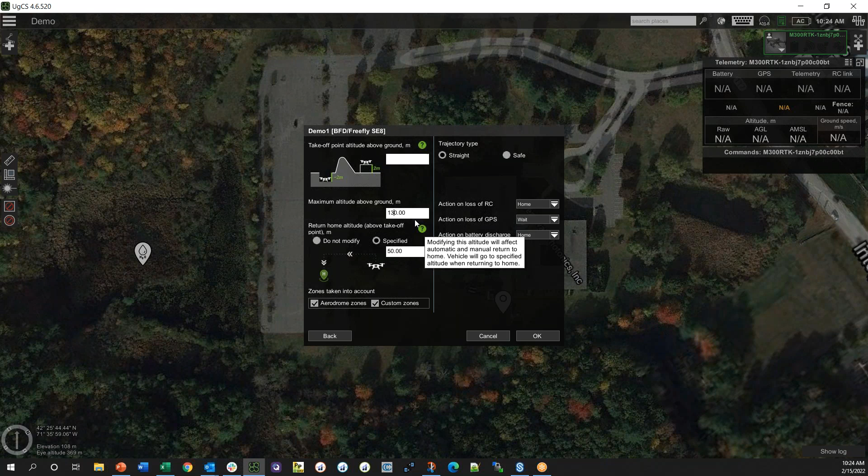Everything else I recommend keeping as is, and we'll say okay. Then you see this toolbar shows up on the left here. We're going to mostly be working on the photogrammetry tool, so we'll click on that, and then we're going to drop in our waypoints.

So we're going to double click, and this is going to be the corners of our AOI. And then once you're happy, click enter, and it'll close that figure.

And then it's going to take in whatever these values are, and then fill in so that you're covering that full lower yellow box with flight lines.

I'm getting some of these warnings here, and that's okay - we're going to click this little trash can icon to remove the action. So anything that says the word action, you can basically ignore or not worry about.

So the UAV and the sensor are obviously physically mounted together, but they're not actually communicating back and forth.

So what an action would be was like, say if you're using a Phantom and you wanted to trigger it to take a picture every 3 seconds or every 10 meters or something like that. So the action would be, trigger.

Whereas here we're not doing any communication back and forth, so anything that says the word action, we don't really care about.

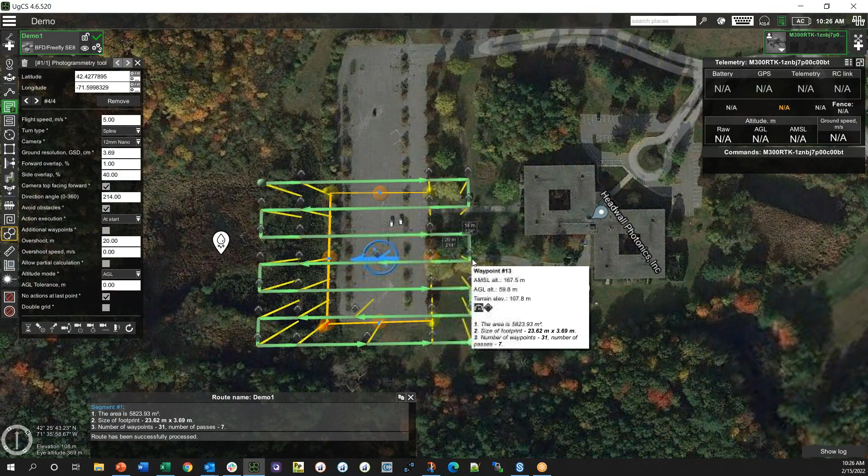Okay, so first thing I'm noticing is we're starting over here at waypoint 1 and ending at waypoint 31. I always recommend making an even number of flight lines, because in this case we're going to take off over here and have to fly all the way through our area of interest to reach this far point. If we make an even number, we start and end on the same side, so we don't enter our area of interest and fly over it getting data we don't want. So either I'd want to make the box a little smaller or bigger. Let's try going a little smaller. Now we're starting and stopping on the same side.

If you hover over it, it'll tell you the AGL altitude. In this case, 59.8, which is good. That's calculated based on the ground resolution, the GSD. The photogrammetry tool works by giving it a desired pixel size, and then it tells you, based on the camera and desired pixel size, what height you need to fly at. In this case I was trying to fly at 60 meters, so I back calculated to figure out what resolution I'd get at that height. Conversely, if I said I want 3 centimeter pixels, I could change that and it would adjust my flight accordingly — to get 3 centimeter pixels, I'd need to fly at 49 meters.

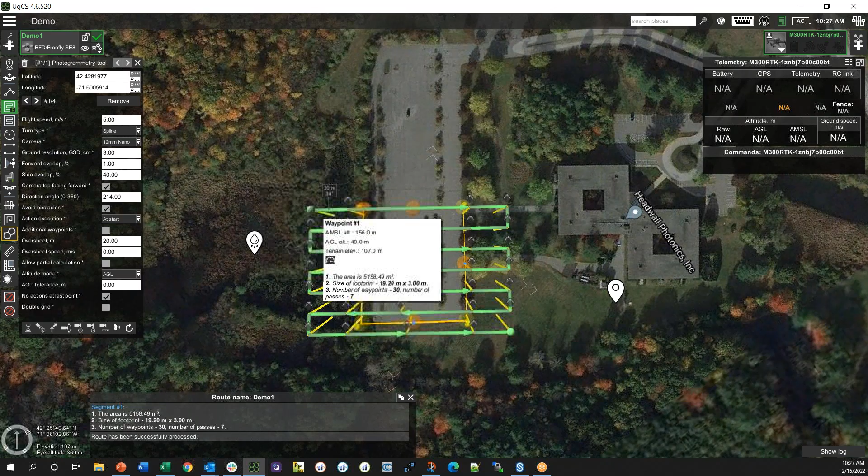Okay, we're going to work our way top down here. Each point in this photogrammetry box has a latitude and longitude. You can see there's number 1 of 4 — those are the 4 corners I dropped in, and you can change which one you're looking at. So if you had a field and knew exactly the coordinates of the corners, you could just type in exactly whatever you wanted for each one.

Again, you can always drag it around however you want. You can drag the whole thing if you highlight that center point, and you can orient it different ways.

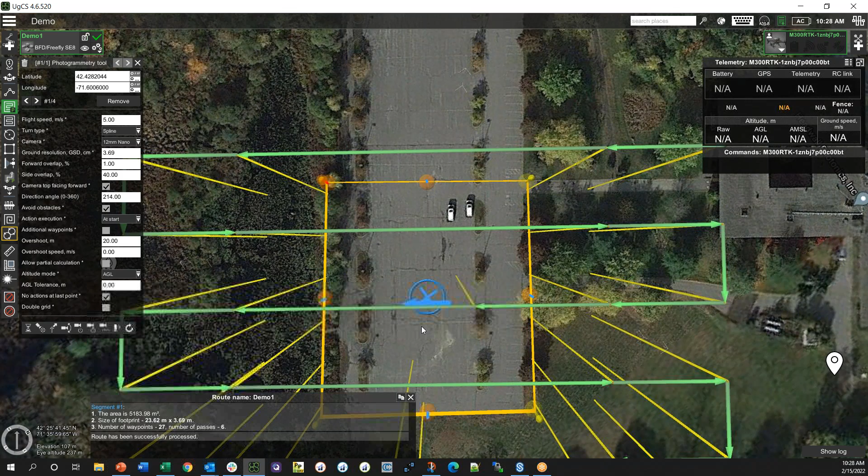Can you import shape files? I don't believe you can import shape files, but you can import KMLs. That might be a question for them — they might have that ability, or if not, they're always looking for recommendations, so that could be something you could request and they might add it in. But yeah, KMLs you can. Either one works. That's good. Thanks.

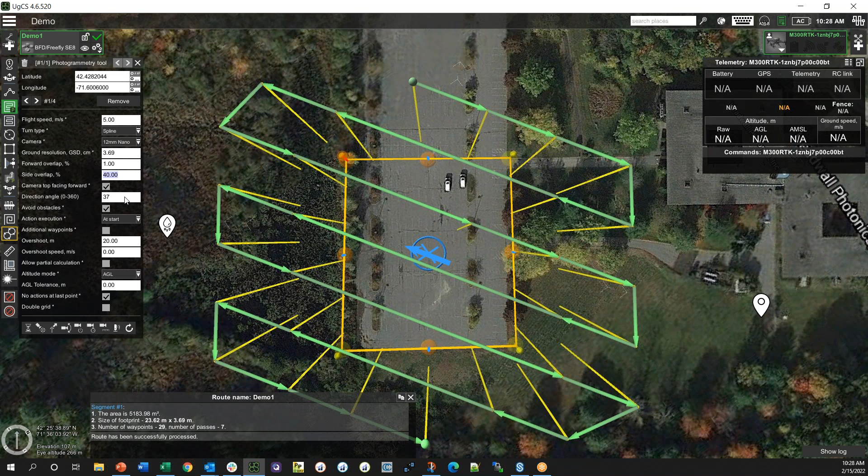Okay, so next thing is the flight speed. That's actually the only setting we don't really adjust ahead of time, because it's dependent on the lighting conditions. Usually I'll just leave it at the default 5 or whatever, and that's the last thing we'd adjust before uploading it to the UAV.

Next thing is the turn type. We have the options of spline or straight. For the GPS inside the system, the spline turns are better — a more rounded, less abrupt turn. The GPS has what's called a Kalman filter inside it, which essentially uses its previous position to try to predict where it's about to be. So anything abrupt or quick takes some amount of time for it to figure out that it's made the turn. Anything more rounded and less abrupt is better, so we like these spline turns.

Camera — it's already chosen that 12mm nano because that was associated with that UAV. I also see I have a different sensor in here that I could have chosen as well. You should only have that one unless you're building in multiple different sensors, so make sure if you have multiple, you select the right one, because that's what dictates the pixel sizes and things like that. We just talked about the GSD, and then overlap — with the line scanning systems we have here, we don't use or need any forward overlap, so we set it to the minimum value allowed, which is 1%. But we do want side overlap, and we recommend 40%.

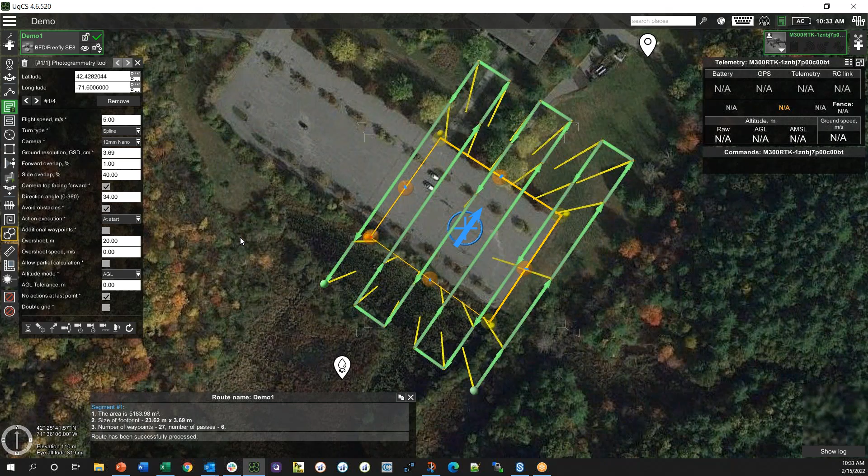Usually what this is, you can build in your own obstacles into the software. For example, I know this over here is like a cell tower or some sort of tower. So I could put in a physical obstacle here that would say don't allow anything within, say, 30 meters of this point that is 100 feet high or something like that. That way, if I tried to build a flight plan that intersected with that, it would say nope, you're going to run into an obstacle. So that's what that would be.

I typically leave it checked, but I don't usually use that feature. I instead will just do a visual check of the scene ahead of time, or fly with a Phantom or a small drone to see how the area is looking, see what's my tallest thing in the area, things like that.

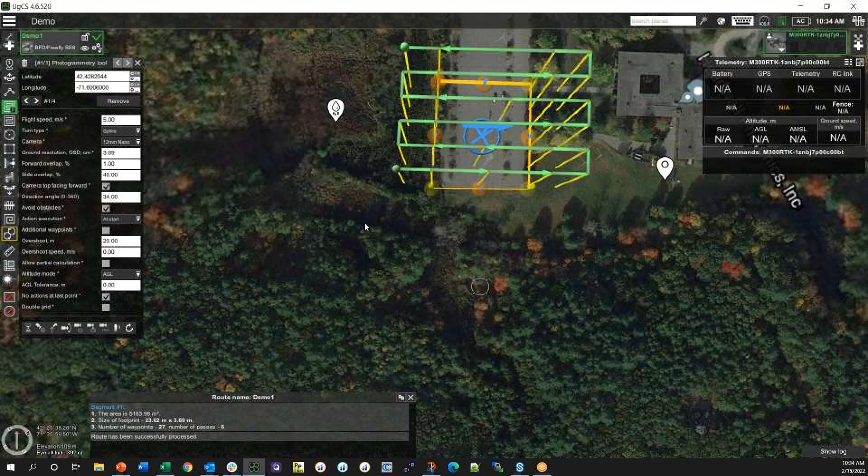Okay, action execution. Again, anything that says the word action, we ignore, we don't really care about. Additional waypoints, kind of a weird feature, but usually we don't use it. You can see if I click it, it's going to add in a bunch more points, which you'd think would be good, except for the fact that I think a lot of these systems can only take in a certain number of waypoints they can hold in memory. I know with the DJI products it's 99. I'm not sure with the SE8, it might be more like 300 or 400, so that might be helpful. But if you have a waypoint every couple meters over a large field, you're going to eat that up really quickly. So usually we don't need this checkbox.

Next is overshoot. There's two ways to do this: either you add in overshoot by having a number here - you can see it added 20 meters on either side of every flight line - or if you are waypoint restrained, you could set that to 0 and then just physically drag your box to be bigger. But we always want to make sure we're executing our turns outside of our area of interest so that we're not taking data when we're doing the turns. So we recommend about 15 to 20 meters of overshoot, and you should be good with that.

Overshoot speed, just leave it at 0 or blank, and it'll take whatever the flight speed is. It doesn't really help to speed up or slow down during the turns - it's more of a battery killer to change the speed like that. So I recommend just keeping it at whatever it is. Maybe if you're flying really slow and wanted to turn around a little faster, that could be okay, but in general, just leave it blank.

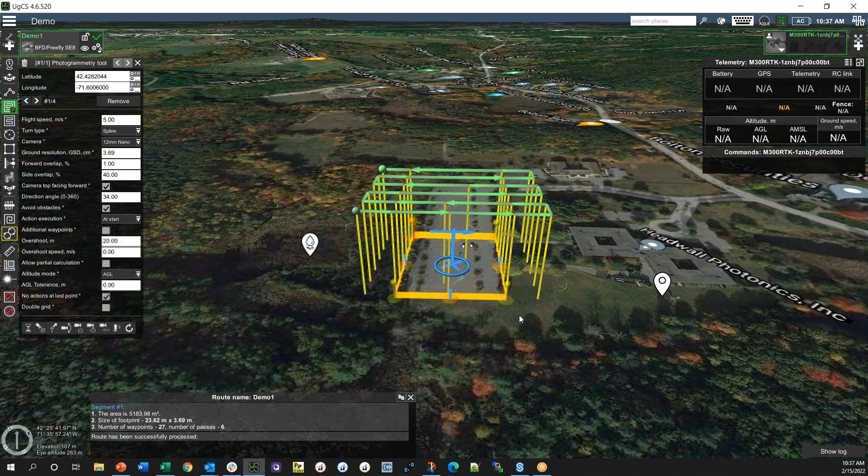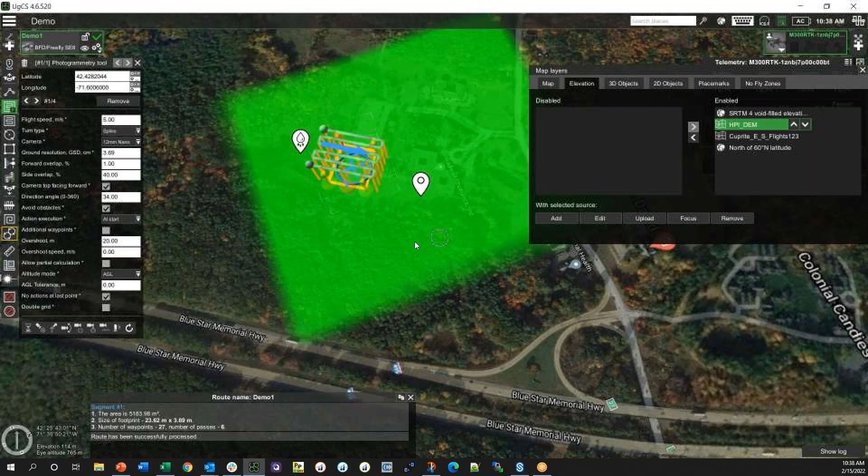Another good feature of this software is you can add in your own elevation model. If you go to map options, map layers, you can add in your own visual map, or your own elevation map. So here this SRTM is the top one, that's what I'm using. But if I click on this one, this is one I generated from a LiDAR flight, and you can see if I'm within this shaded green area, it would use that elevation model, which would be much higher resolution than the 10 or 30 grid that the SRTM one has.

Just be careful if you're ever using your own elevation, you don't want to span from one to the next. If you zoom in over here... that's why - there, now I'm using that. You can see it'll take whichever one is highest on the list. Because there's some sort of change in the datum between the one I have, which you can see all the relief from the trees, and this one, you don't want to span from one to the next because there's this imaginary cliff it'll get really confused by. So if you're ever flying with your own elevation model, just make sure you're not spanning from one down to the next.

And you can see here, now if we look back at the mission, it's going up and over this tree and things like that, because it has all these cars in the parking lot from when the DEM was made. So I'm going to go back for a second.

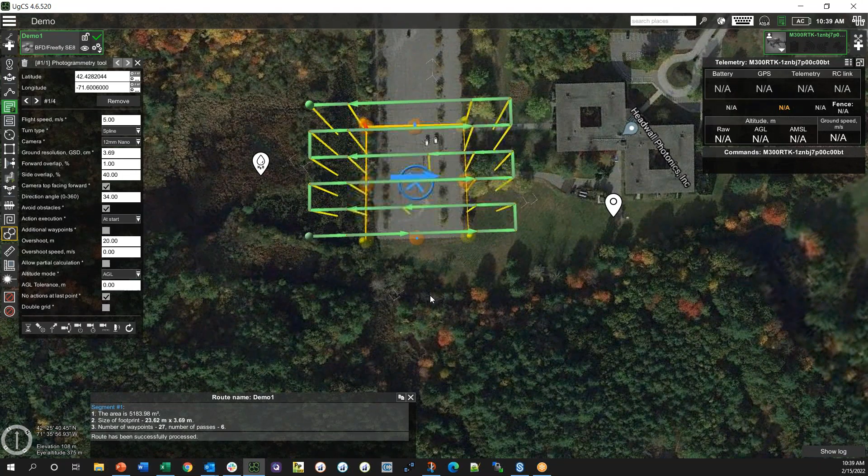Charles: does it matter what file format these DEMs are in? It does - I think there's 3 or 4 different kinds, I don't know those off the top of my head, but I think there's something on their website which says which are acceptable. Any TIFF file should be fine, and I forget which other ones they can take in, but there's a couple different types.

So it sounds like the fine scale local DEM may actually cause trouble by making it go up and down over trees or cars that used to be there, and a smooth one might be better to get a more consistent pixel size. Yeah, so it's kind of up to you.

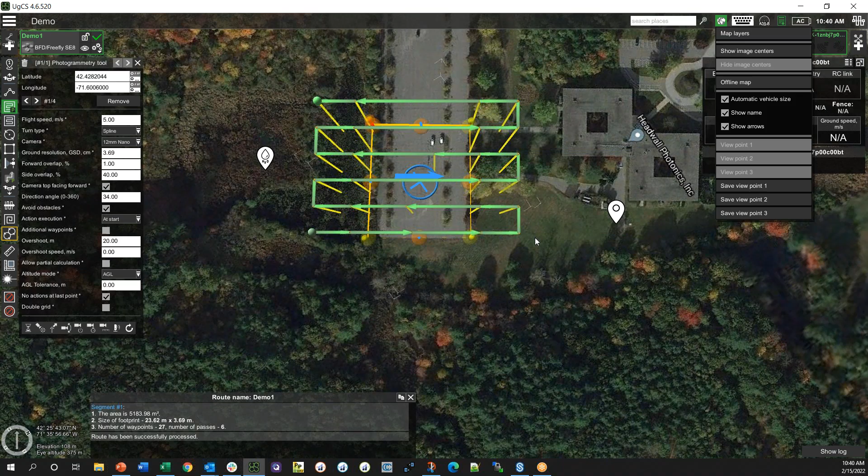So if we go back for a second here - what I kind of recommend, this bottom thing, this AGL tolerance, that's a way you can make your elevation coarser or less coarse. For the SRTM DEM, it's already very coarse, so I brought this AGL tolerance down to 0.

Whereas on the opposite, if I'm using this guy, now you see I'm going a little bit too jaggedy over this tree and things like that. Maybe what I'd want to do is make this a higher number, like 3 maybe, and that would smooth it back out a little bit. So you can mess around with both ways and see what's best for your situation - maybe try 3.

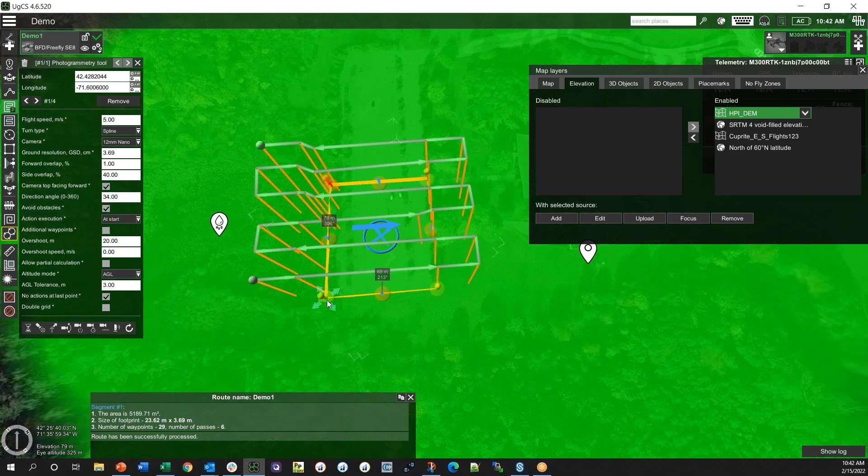You always want to be the most consistently above the terrain as possible. In most situations, the generic SRTM DEM is good, but if you are in places with high relief or hilly terrain, or for example missions in mines where the ground has physically changed since the DEM was generated, then I imported my own and used it that way. It's kind of up to you and the location to figure out the best course of action for that area. Typically if you're flying over relatively flat areas, fields, rivers, or in this case a parking lot, it's fine enough to use the SRTM DEM.

So the modes are AGL, AMSL, or this rangefinder option. I don't know what that rangefinder is, but AMSL basically means you have a constant height above sea level. In this case it would take in, probably from the first point, a height of 60.2 meters above that point, and then everything stays the same height - it's not going to take in the elevation data. So we always want to be in AGL.

Then I was talking about this AGL tolerance. For the SRTM DEMs, I recommend going towards the lower limit. You can see by going from 3 to 0, it's about how closely it follows that elevation model. It added in a few points because it recognized there's a small hill over here, so between here and here there's relief of more than 0 meters, and it said I'm going to add in a few different points so I can more accurately follow that terrain.

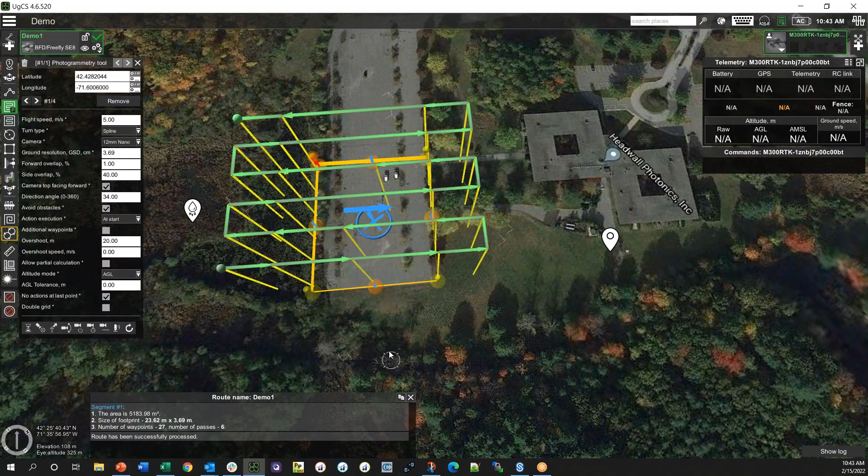Next thing we're going to do is this add first waypoint button. I'm not sure about the SE8, but with a lot of other UAVs I've used, there are built-in safety features that won't allow the first waypoint to be more than 30 meters away from your takeoff location. So I want to build in where my first point is, and now it's going to fly here, then here, then do the ladder pattern. Conversely, you can add one at the end as well. You always want to make sure you're adding after whichever point is selected - I'll click on this waypoint, then add after that last point, and it'll bring me back over here.

So that is the flight planning part of it. The second thing to be aware of is the polygon, which is what the sensor uses to trigger. You can create that polygon as a text or KML file - in Google Earth, with our online polygon tool, but I actually really like using UGCS for that as well, because it's much easier to overlay the flight plan and that polygon tool at the same time.

I'm going to click Add New Route and name it Polygon. We're not actually going to do a flight with this - it's only for the information of where the waypoints are. You can click whatever UAV you want, we'll just click the SE8 again. Next, and this time we're going to use the perimeter tool. Now you can see we have two routes - our first one, and then our polygon. The polygon doesn't have anything in it yet. You can see this one turn bluish because it's in the background now. For the polygon, we're going to go to our perimeter and drop in our box, then hit enter when you're happy.

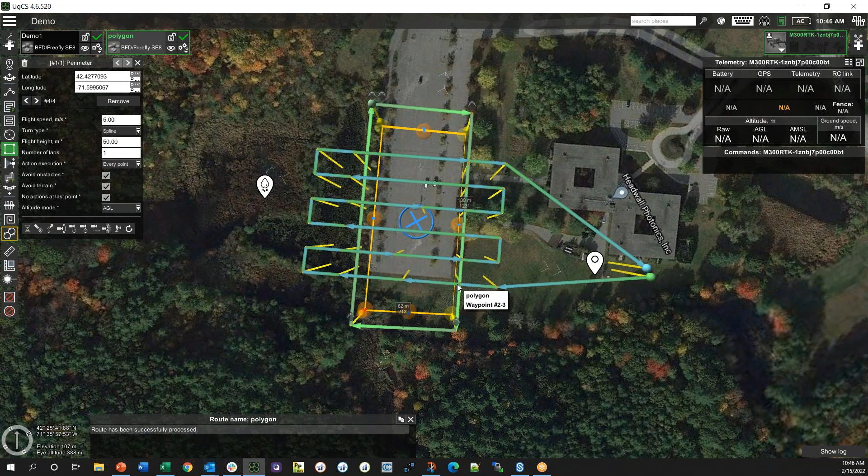Now I have this flight plan, which I can export as a KML, so I have the information of where these points are. Anytime I load this KML file to the sensor, whenever the GPS says I'm inside that area of interest, it's going to turn on capture, and anytime I'm outside, it will pause capture. So in this case it would be off, off, off, off, off, and then when it hits here it's going to collect until it gets to here, then pause while it does the turn. You want to line up your polygon with where your overshoot starts and stops.

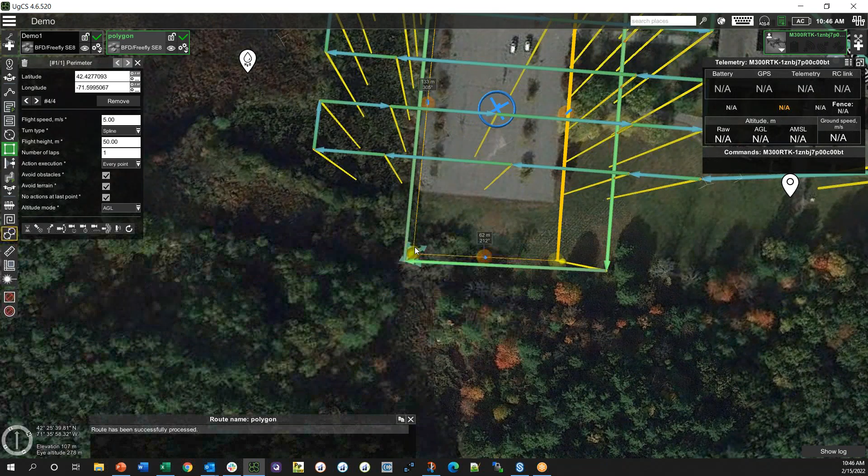That's pretty good. You also want to make sure that your polygon is a little bit wider than your flight plan, because the GPS on the UAV is not super high grade. So you tell it to fly this line, and it could be a meter to the left or a foot to the right or whatever. You just want to make sure you have a buffer on the sides so that you don't accidentally miss the first pass of data if you flew just over the edge. So I always like to make sure this is a little bit wider.

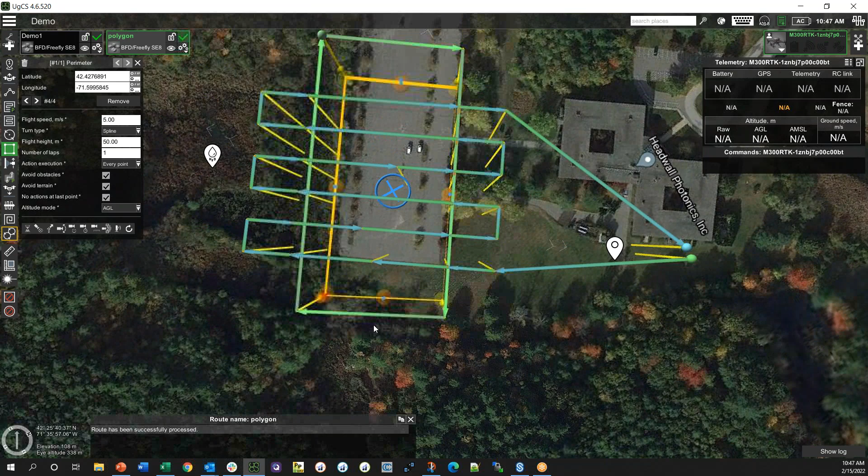And once you're happy with your polygon, you go to parameters and export to KML. You want to export it as a line string, and then give it a unique name or location and save it.

And when you're done with your mission, you go File, Export Mission, and it'll save as whatever this name is unless you change it. Then you should be good to use that when you're ready to fly. Okay, so I think that is most of it for the UGCS stuff. Any questions on any of that?

So it automatically decides when to snap the photos based on the camera specs, flight height, and amount of overlap. As it's moving along the flight line, it crosses into the polygon, and after that it takes images at a frequency based on its calculations of the correct overlap in the footprint. So you don't have to control anything about when the actual camera is triggered.

We'll go into some of that setup, the acquisition setup, next. But basically you figure out all the parameters on the ground, then load in this polygon, and once it enters, it will collect frames continuously from here to here at whatever rate you told it to. It'll pause when it's outside, doing its turn, then start again here, pause here, and so on and so forth. But yes, you're correct.

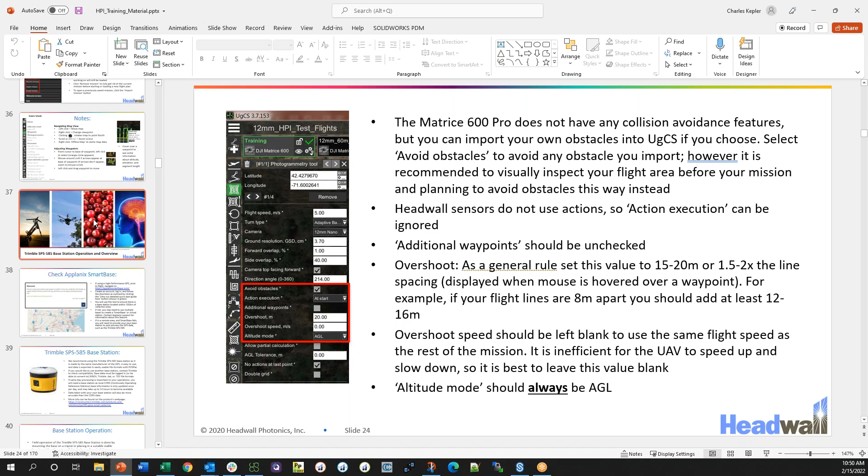Okay, I can't remember—did you guys purchase a base station with your system? I'll take your silence as you don't know or no. We did, I believe we did. Yes, we did, with the Expo.

Okay, so if you purchased it from us, it would look like this guy, the SPS 585. How it works is the UAV is the rover, and it needs a base so it can do all of its calculations on where the corrected trajectory was and all that kind of stuff. So the base, you will set this up before the flight. It needs to be logging for at least 15 to 20 minutes before and 15 to 20 minutes after.

If you don't have one of these, or don't have it on that specific day, that's okay. There is a network of CORS stations, continuously operating reference stations, hosted by the government. You just have to make sure there's a station near enough to you. Anywhere in the continental US, you should be fine. If you were to take this into the jungle in South America or somewhere, you might want to check ahead of time or make sure you bring the base station with you. So basically, set this up a little bit before and leave it running a little bit after.

What it's going to do is it's just going to continuously collect its GPS location, and then over time it's going to have an average and know exactly where it was. Then it uses that known location with the location from the raw GPS files, and it does some corrections to say I know exactly where I was based on all that data.

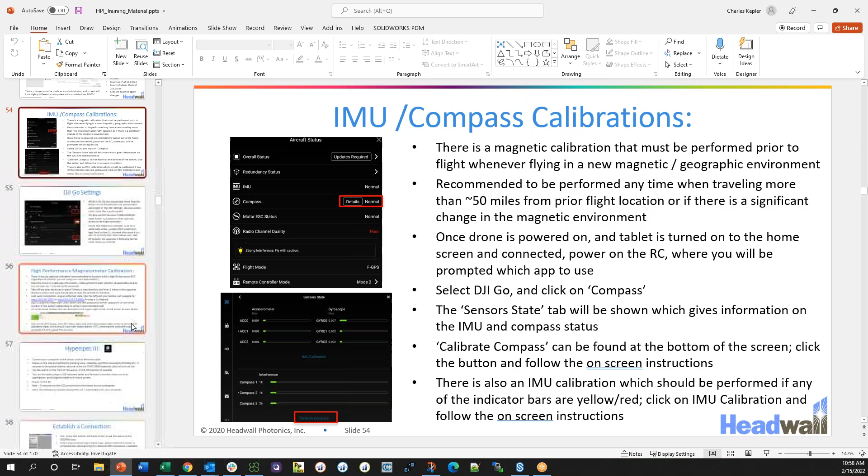There is a magnetometer calibration though for the GPS in the co-aligned. So this has already been done once, at least for your system, while it was at Headwall. But it says it's kind of an optional calibration.

It's recommended anytime you're flying in a new geographic location or a new magnetic environment. So anytime, my recommendation is anytime you move more than 50 miles or something like that, or you're flying somewhere where the ground has significantly changed. Like for example, if you're going to go fly in a mine or something like that, where there's a bunch of different rocks and things like that.

So what that would be is you'd let the system be powered on, sit on the ground for 1 minute, and then take off. Once you're in the air, you're going to rotate clockwise and then counterclockwise, 3 full rotations in each direction, with each rotation taking at least 10 seconds. You're going to rotate 3 full times and then rotate the opposite way 3 full times. And then you should be all set there.

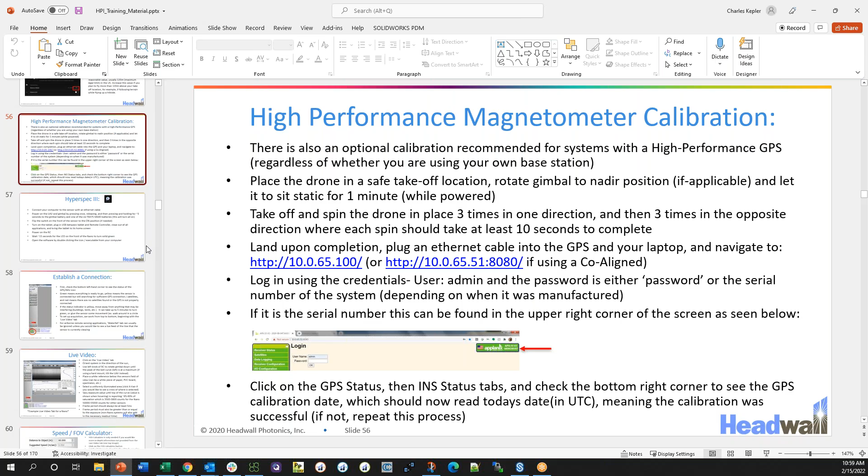Okay, into HyperSpec 3. So let me jump forward for a second here. Okay, so...

Here's kind of a diagram of what the co-aligned looks like. So instead of the M600, you'd have the SE8. But so on the UAV, you have your antenna and your power coming out. Inside of the co-aligned, you obviously have your VNIR and your SWIR. The LiDAR you guys don't have a LiDAR, so you would ignore that part.

The Applanix is on the SWIR side, but it is giving data to both the VNIR and the SWIR, and then the HyperCore is the computer for the SWIR. So you have your computer, and then you're going to need to connect the Ethernet switch, because there's the 2 Ethernet ports on the co-aligned.

So the Ethernet switch gets powered by USB, and so then you have laptop into the switch with an Ethernet cable, and then 2 Ethernet cables from the switch, one into the VNIR, one into the SWIR, and that's how you can talk to both sensors at the same time.

To connect to the GPS, if you want to check that that calibration took, or if you want to download your GPS data after the mission, you're going to go to 10.0.65.51:8080 while you're connected to the SWIR port, and that's how you would download that data.

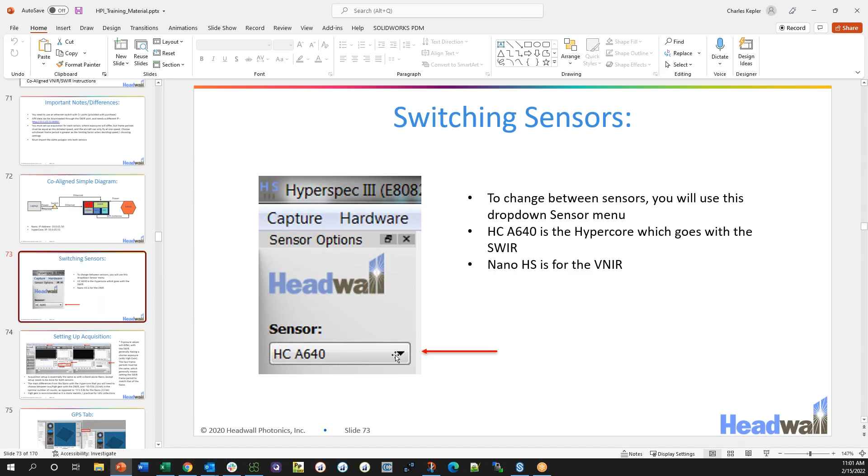Okay, so in HyperSpec 3, you'll first notice this sensor tab. It's a sensor dropdown, and you'll see something like HC for the HyperCore, and then if you click the down arrow, there'll be one for nano for the VNIR.

So when you're setting up the co-aligned system, what you're going to do is consider it as 2 separate instruments that you have to set up. So you're going to open up the live video on the nano, and then you're going to open up the live video on the shortwave. And so you'll have these 2 separate plots.

They'll look pretty much the same, with the exception that the shortwave has a gain level of high and low. We recommend high gain for anything remote sensing based, because otherwise with low gain, you would have to fly much higher and slower. So even though with high gain you sacrifice a little bit of signal to noise, it's much more reasonable to use high gain for anything remote sensing based.

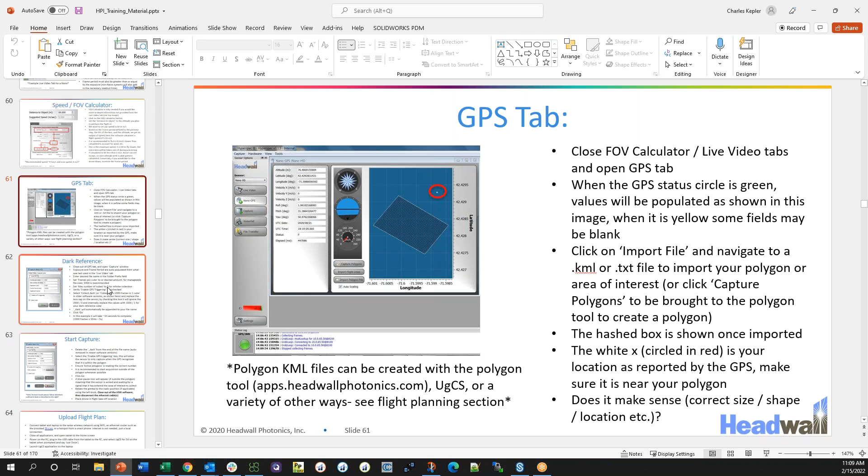At this point, you're ready to take your dark reference. So we're going to open up the capture tab. Here's what I was saying, you have to do it on both sides. Okay, capture tab. So for the co-aligned, this is actually the only tab that you have to click on only one side because it has integrated both.

So you'll click the capture, and you see it says Nano and Hypercore. You'll give it a name, whatever you want, Cornfield 1 or something like that. It'll be appended, it'll add in before the file name, when it's actually created, a string of numbers like 00015, which means that's the 15th data set stored on it. Then it'll say corn 1 or whatever you tell it in this folder prefix, and at the end it'll attach the timestamp. So it'll say something like 02152022, and I think it might have the time as well.

So we have frames per cube and max number of cubes here. Frames per cube is how many lines are going to be collected before it writes the file. In this case, what we recommend is 2000. That gives us reasonable file sizes of about 0.5 gigabyte per file. If you make it bigger, you're going to have larger files which are harder to work with, and if you make it smaller, you're going to have a lot more files. So we've found that 2000 is a good middle ground.

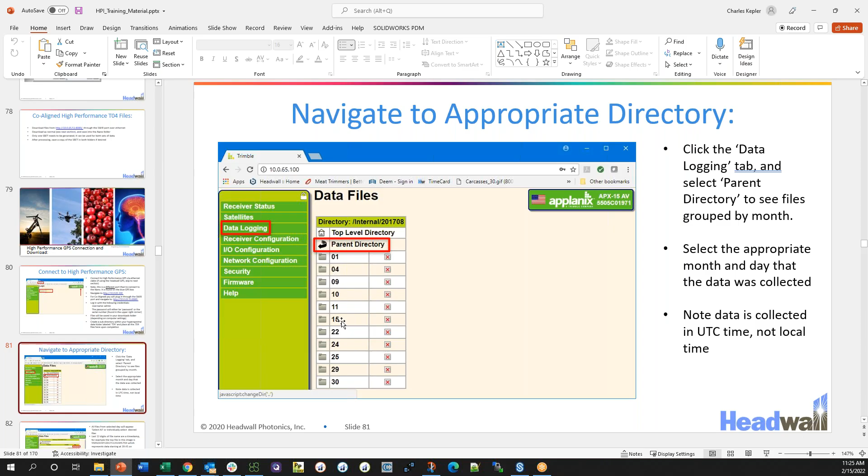To download your data, you'd go to this data logging tab, then the parent directory, and then there's going to be, it'll look kind of like this, but it'll be the number of the month. So for February, you'd go to 02, and then today you'd go to 15, and then it'd open up all the files that were taken for that day.

So here you see that it has a unique file name. This 55 blah, blah, blah, that's the serial number of the system. And then this specific file was taken on 2017, 11/15 at 1945 UTC time. So each of these files are 3 minutes long, so you can see we have 24, 27, 30, 33, 36, 39, blah, blah, blah.

So you want to figure out which files overlap with your flight time. I recommend doing that by, if you go to your, here, I'll just show you an example.

In your data directory, there'll be a file called imu_gps.txt. What I recommend, this file is started as soon as you click the go button. So you want to find this number, which is 1532, and then the last number is 1550. So you want to find the files that encompass between 1532 and 1550 in increments of 3.

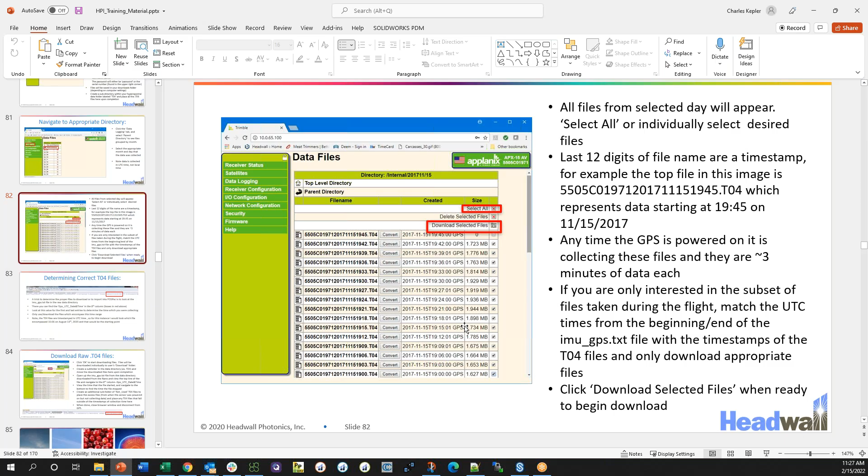Here, like I said, when you click all the files and then download selected files, a pop-up like this will pop up that says, do you want to download these selected files? So you say okay, it should just go into your downloads folder. And once it's done, then you can copy those into, I like to put them in a subfolder that I label APX or GPS or something like that. And then I put that directory in my data directory as well.

And so the next thing is, once you have all the GPS files, is to create the SBET through POSPac. So I think maybe I'll do a quick live demo as well for that.

Okay, so this is the POSPac software. It is sometimes a little bit of a pain to get licensed. So you'd have to go into, when you download this from their website, there should be this thing called software license utility, which is downloaded alongside it, which I'll show you quickly.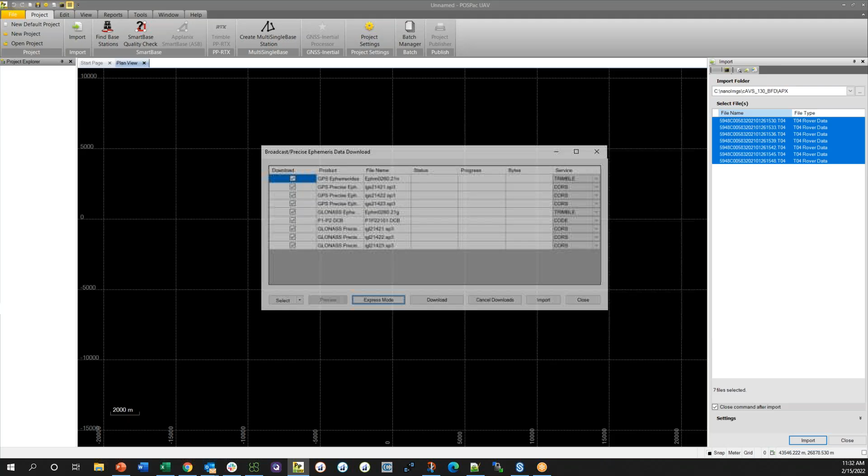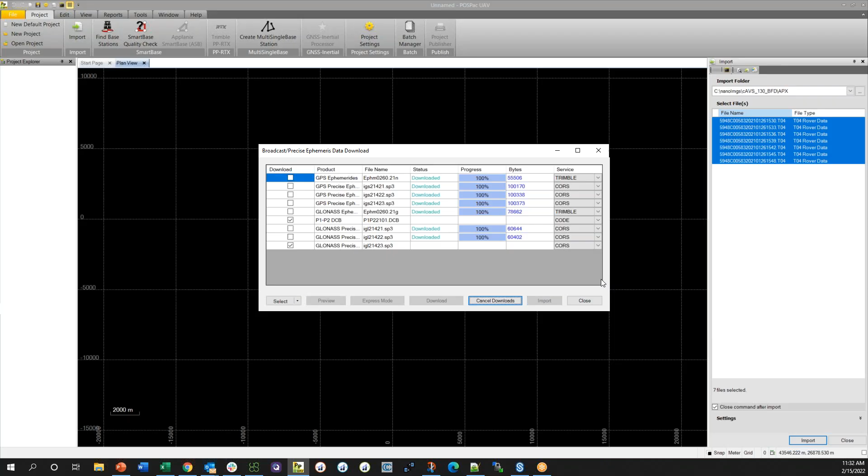It's gonna do its thing. And boom, here we are. So you can see this is my pattern over the parking lot. Looks like I did 6 passes. And you can kind of see my down and back from before and after the flight, and then some kind of wonky data from when I was sitting on the ground.

So at this point now I can also go back to the import again, and now I'm going to also import the base station. This one I had labeled 01/26/2021. That was probably the date that I did this flight.

And so now that I have my base and my GPS data, at this point you want to go to this little drop down and then find base stations. And then I'm going to right click this and do this compute RTX coordinates.

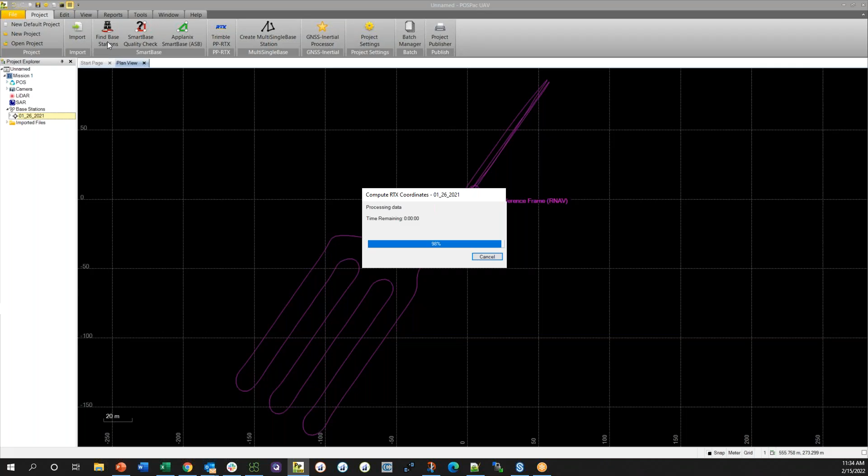So I'll show you both ways, or at least give you a quick overview of how to do it using your own base station and using the CORS network. If you're using your own base station, you import it like I just showed you. And if you're doing the CORS network, you're going to use this Find Base Stations button, and then it'll pop up.

Once this is done, it says horizontal sigma and vertical sigma, do you accept that? Which is 6 and 10 centimeters, which is good. So I say yes.

Okay, so if I didn't have a base station and wanted to use the CORS network, I'd do this Find Base Stations button. It's going to look and find all the networks that are within 200 kilometers of me. So you can see I have this one that's 19 kilometers away, this one's at 22, 31, 35.

And so I would say do none and then select the first one. From experience, I know that for some reason this first one always fails here at Headwall, so I think I always have to do this second one. So I'm gonna skip that for now and say download and import. Maybe it's actually the third one. There.

And then once you see it pop up in the background, I can click close. You can see this MAWM, which was 30 some odd kilometers away, and then my flight area is over here. So now I have two options here. You don't need to do the RTX coordinates on the base from the CORS network because they already apply that. So now at this point, you have your raw data, you have your base station, and then you're gonna click whichever one you want, right click it, and do set base station.

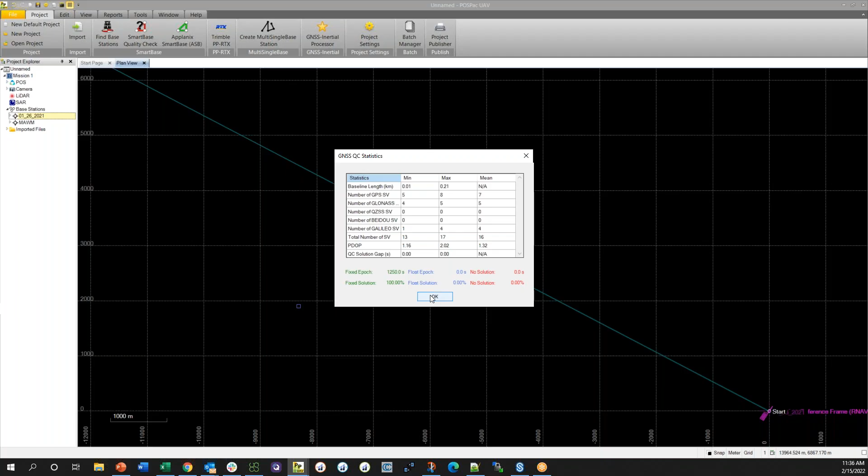And then once it's done, it'll give you some statistics, and as long as this fixed solution is, I think usually more than, as long as it's more than 90 or 95%, you should be good here, which is 100, obviously higher, so I say okay.

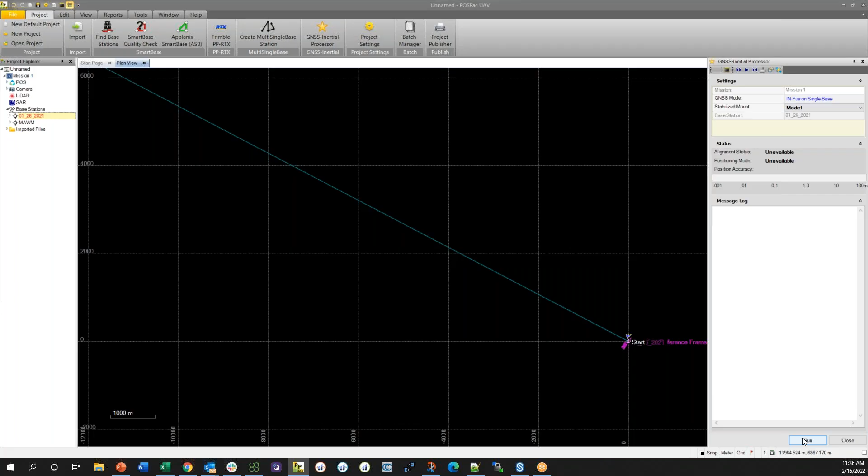And now at this point, we're ready to do our GNSS inertial processor step. So we're gonna go IN-Fusion single base, use that single base, and then stabilize mount. This one was done with a gimbal. And so we say model and then run. This is where it does all of its smoothing and processing and so on.

Once it says smoother completed, we're basically done. We just need to now export that file. So we're going to go to tools and export, and we're going to export the file as a custom smoothed BET, which is SBET. And then we're going to give it a name and location.

So we'll go see images here, and then we're going to give it a unique name. It has to have the string SBET in it because that's what our software looks for. So do SBET demo and save. It's kind of confusing - you click save, but then you still have to actually click export after. That's just saving the location.

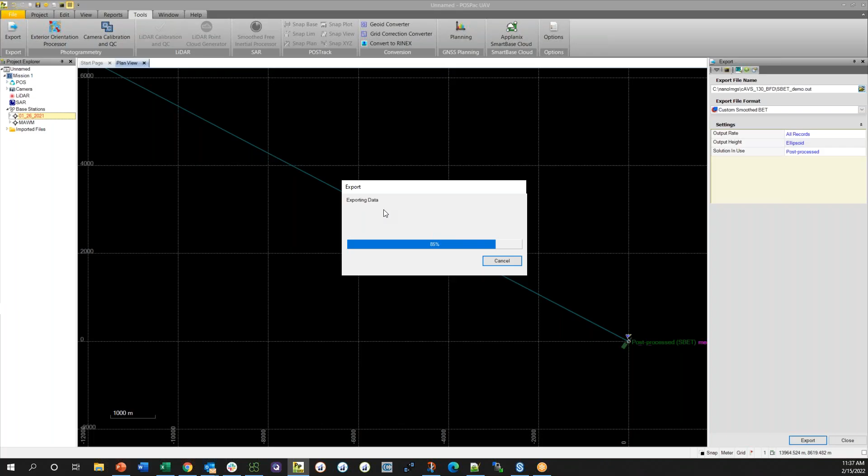And then at that point, you can either export it again to the other folder, or you can just make a copy and paste and put it into both of the flight directories. So in this case, I would go copy and then put it in the VNIR folder, although there should already be one there, maybe not. And then we'll put it into the SWIR folder. And then we are good with our SBET file.

So at this point, usually I don't even worry about saving the project because, as you saw, that's relatively quick and straightforward to recreate. But if you wanted, you could go file, save, and save so that you could bring this back up at a future time. But I'm gonna not do that for now.

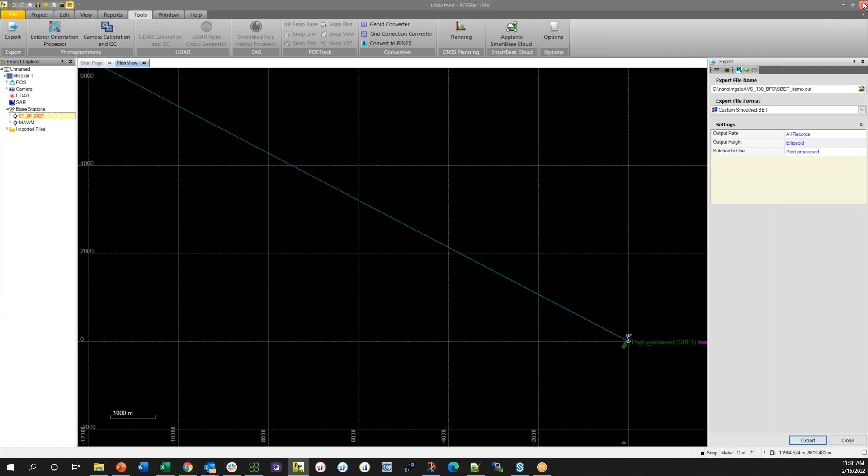There is one setting you have to change the first time you install the software, which is outlined here. So you go to tools, then options, then import and process, and you want to check this: use real-time reference to primary GNSS lever arm. You just want to make sure that is checked - it is by default, if it's not, you'll have to go in and check that. Everything else here is all the stuff we just talked about, so go ahead.

Don't have a LiDAR on this system, so I'll skip through that. Billy does have a LiDAR, so it might be good to go through that. He has a Puck with the Nano. Okay, so I'll give you maybe not the full in-depth, I'll give you some high level info here. So we would have done a LiDAR test flight with that system.

So the flight kind of looks like this, where we go parallel and anti-parallel flight lines over our building, because it has some nice structure and relief. So we fly over, turn around, fly back, and then we go up - that's at 40 meters - then we do it kind of the opposite direction here at 60 meters. That gives us different perspectives and orientations and altitudes of all the same stuff.

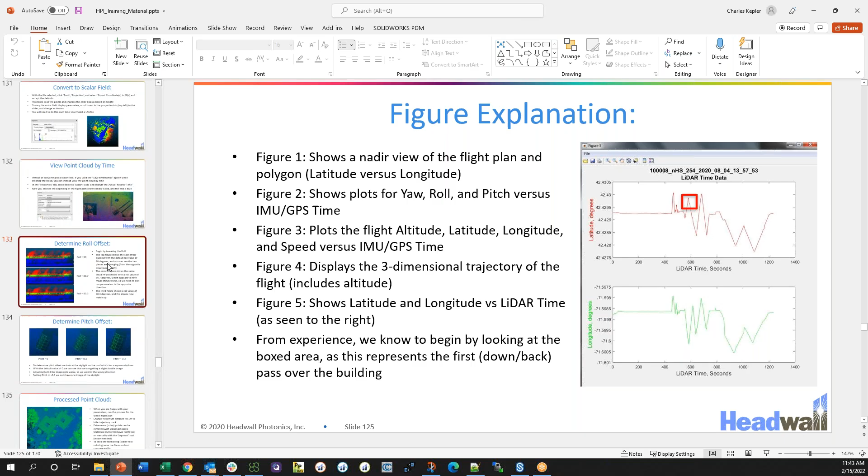So let me just talk about what we have done here. We would have figured out these, primarily it's just the roll and the pitch that are modified. So the default is 90 for roll, and you can see here by this image, it's kind of hard to tell, but this is actually the side view of our building, where it looks like we're getting 2 images of the roof. So clearly there's only one roof, so we need to make an adjustment. In this case, I went minus 0.3 degrees of roll to 89.7, and it looks like the roof got further apart from itself.

That's clearly the wrong direction. So I went 0.3 in the other direction, and now we only are seeing one image of the roof. In this case, I would have given you this ortho INI or LiDAR INI file, which came with a roll of 90.3. That way you would start with 90.3, and then you may still need to make small adjustments to do some fine tweaking, but at least you'll have a good starting point.

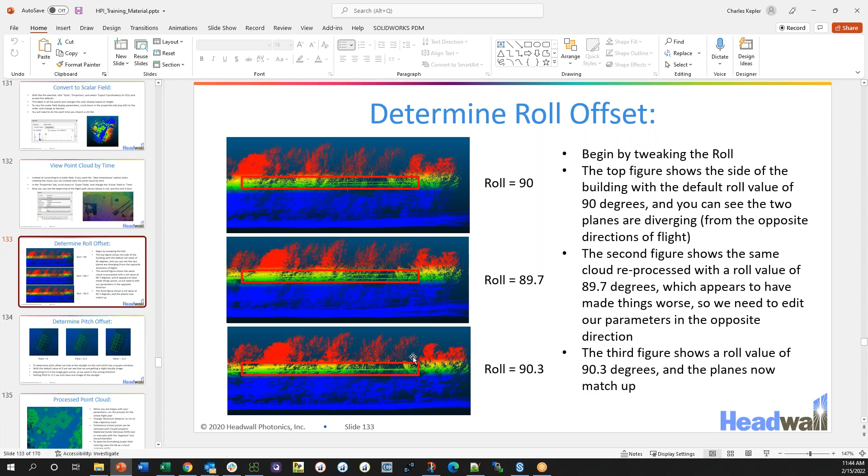Same thing with the pitch offset. Here's 0, where we're looking at this skylight. So this is the direction of the pitch. If I went to 0.3, it looks like it got worse. And then if I went minus 0.3, it looks like it is lining up correctly. So for this example, you would have started with 90.3 and minus 0.3, and then you would have had a good looking value to begin with.

Billy, did you have any specific LiDAR related questions, or did you want me to go into a more in-depth example, or what?

I don't have any specific questions, but I also don't know anything about LiDAR really. I just have a general overview of it. So for someone who doesn't know anything about LiDAR, should you go into a more in-depth thing for me or us? I'll just give you a little more info, I guess.

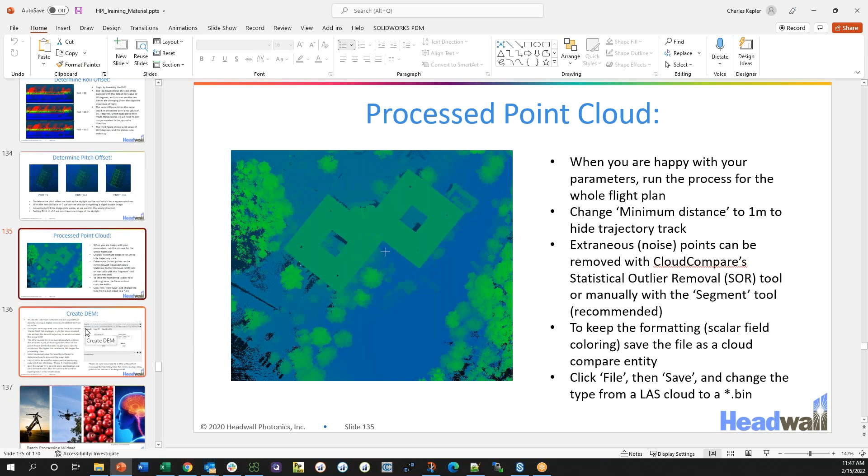And then from there, you can create an elevation model, which you can do through our LiDAR tools software. So I'll just do a quick demonstration.

Could I ask a quick question? So the LiDAR is using the GPS from the Headwall, is that what you're saying? Correct. And is the IMU in the Headwall also? Yes. Okay, I did not realize that. I thought typically the LiDARs had better IMUs, or I don't know. Well, there's a bunch of different levels, and so certainly the puck does have an IMU in it. You're using the Headwall's because it's a better one. To my knowledge, I don't believe that the puck has an IMU in it. And if it does, then yes, we're using the better one from the Applanix. Okay, thank you. Yep.

Okay, so here I'll do a quick processing example here. So the input file, we're going to click this little folder. Let's see if I have a good data set. Okay, so you're going to find this lidar.pcap.idx file and open it up.

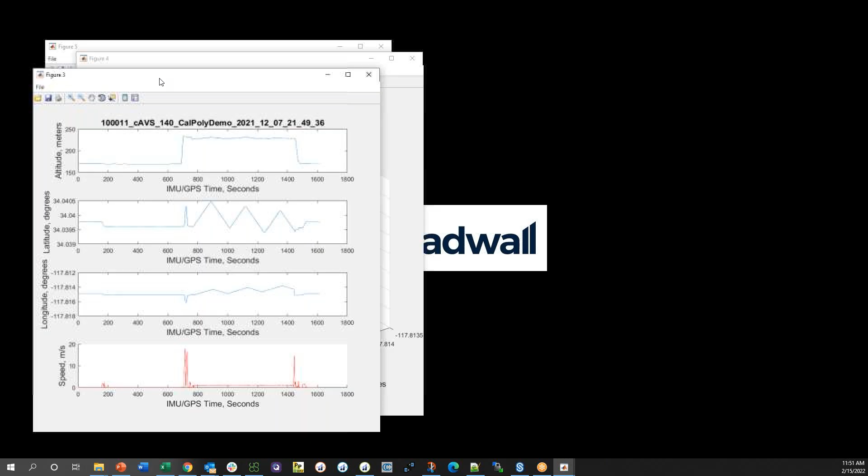Okay, so for this one, looks like this blue was my polygon, and then this was the flight trajectory. I think I did this one kind of on the fly, and so you can see I didn't do a very good job, and I missed collecting here and here, but that's a different conversation. And then here we have all of our roll, pitch, and yaw versus time, our altitude, latitude, longitude, and speed versus time, 3D plot, and then our LiDAR time.

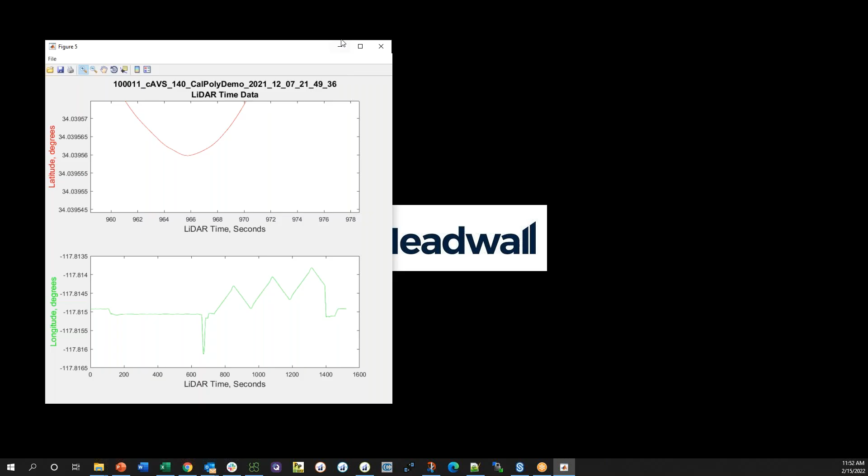So for this one, I would say, okay, let's go from 720 to, well, I'm not going to do the whole thing because that'll take longer. So I'll just do this first, down and back, 720 to 966. So I'll put from 720 to 966, and maybe I'll put that in my name as well.

You can see this minimum distance is set to 1, which is good. If you set it to 0, you actually get some returns from the aircraft. So you want to make sure you exclude those, although sometimes it's kind of helpful to have the trajectory in the sky that you can evaluate, but you obviously don't want that for any of your elevation or DEM creation. So you want to exclude that.

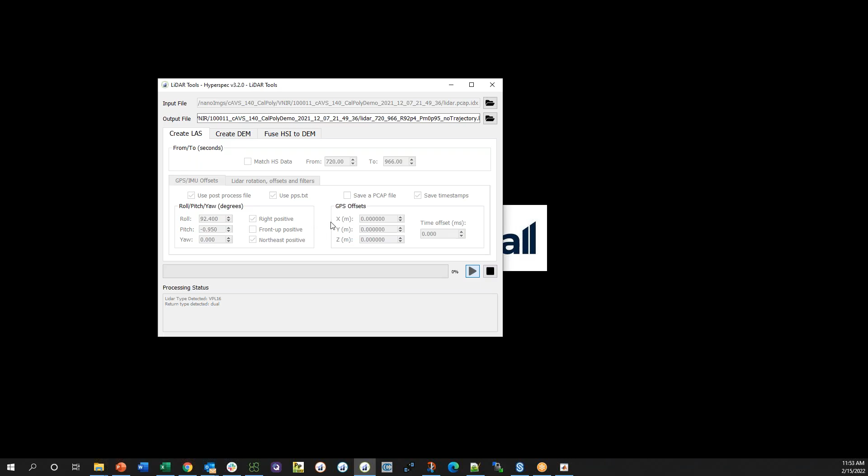So then I say no trajectory, and go. You can see from that LiDAR INI, it automatically is using this post-process file and the pps.txt file. And we also recommend using this save timestamps checkbox.

Once it's done, we're going to open up in this Cloud Compare software. So just give it a second here to finish. Almost there. Should be done, it should be done any second now.

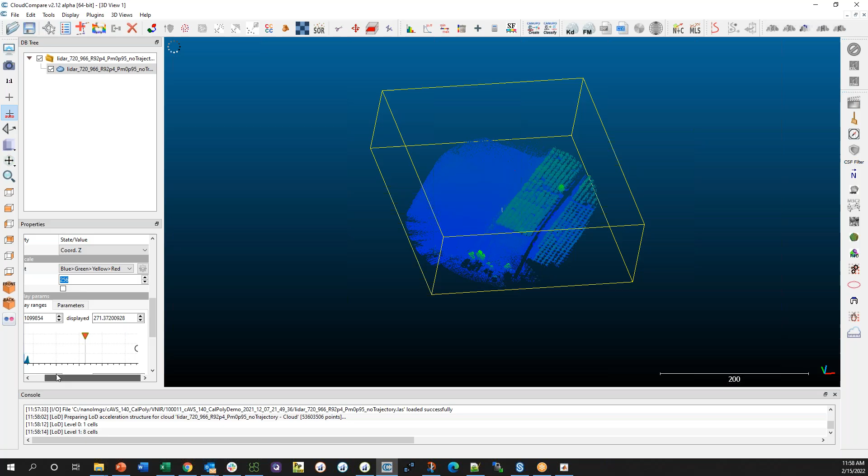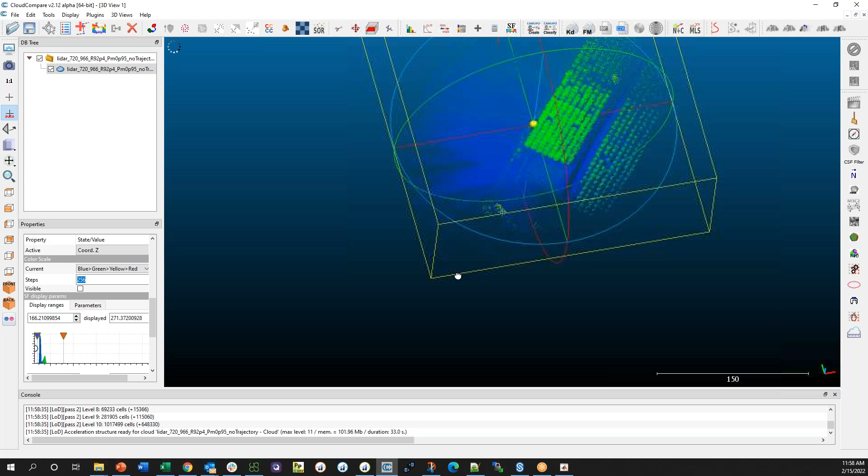And now if we go here, slide down, we're going to adjust our thresholds here. There, so now you can see the top of this tree was starting to turn red. The tops of these trees are all green, and the ground is blue.

And so, see, these are all some cars and things like that. But when I first loaded this in, I saw that there was a couple speckles that looked like they were out of place. So what I'm going to do is I'm going to go to this point size default, make it bigger points, and you can see these. There's a couple of these red points here, which if I look at it from the side...

What these are actually reflections from the sun, because the sun is emitting at 906 or whatever nanometers, which is what the LiDAR is spinning at. And so these are actually, we kind of want to sort these out because we don't want points in our sky.

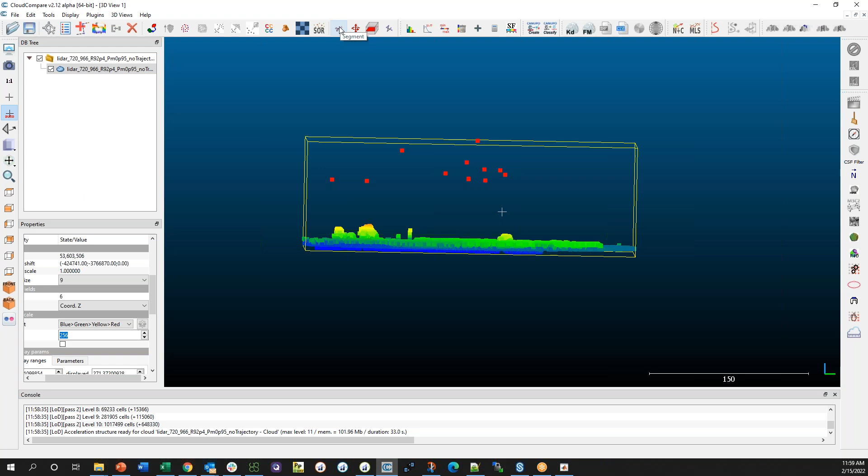So we're going to go and do this little scissor icon, and we're going to do the segment tool. We're just going to draw a little box around the points we want to get rid of. Right click when we're done with our box, and then segment out.

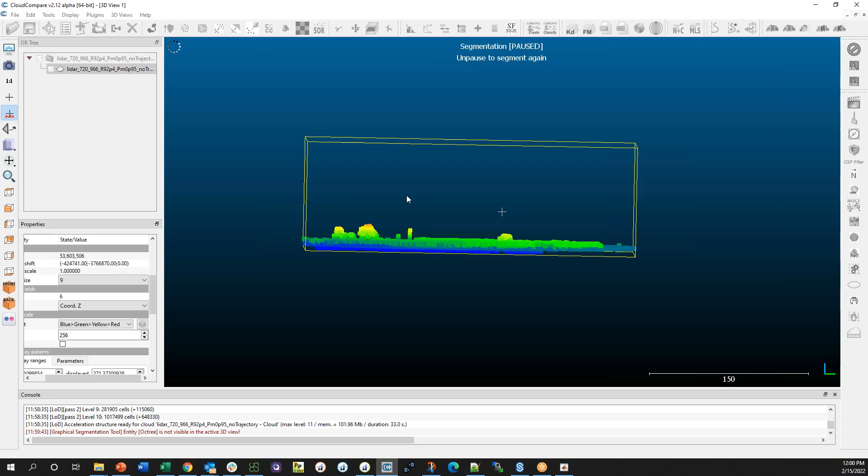Click the check mark, and then it's going to split this into two separate point clouds.

And so now, if I'm happy with that, which everything looks pretty good here, I can then save this file. And you can see, since I kind of cleaned it up, I'm going to save it as, I like to call it, a clean cloud. Put it in the right spot.

And then I'm going to go back to our LiDAR tools, and then there's this create DEM tab. Once that file is finished saving, I will load that file in, and then I can generate my DEM from that point cloud.

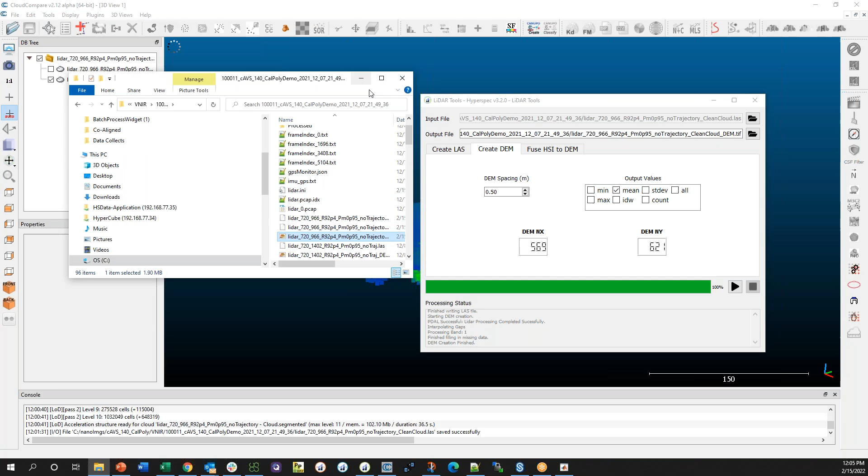Okay, so I'm going to close out of this stuff for now.

Okay, so next, I'm not going to get into this too much, but I wanted to let you know about this new tool that we are working on, or have a beta version of, that you can use if you're interested. It's called the batch processing tool, or the batch processing widget. If you go to these links, there's a tutorial video and a link to download. Like I said, it's not actually an officially released product or anything like that, but it seems to be very useful.

Just keep in mind that it's not really a fully released product yet, so it could have bugs and issues and things like that.

But basically what this does is it uses more or less a lot of the same code as our SpectralView uses, but it does some automation. So instead of doing all of your processing on a single flight, you can do it on what we call a mission, which would be a set of multiple different flights.

And so how it works is it would look at the directory and say, okay, here's the flight data number 1. I'm going to go into that and convert everything from raw to radiance, and then from radiance to reflectance. And then from there, it would actually go back and delete the radiance files, because typically you don't want those or don't do anything with them, and they're just extra space and easily recreatable if you need them later. So it would delete them for you.

And so this way you could basically have a bunch of flights that you say, oh, I'm going to just let them run overnight or over dinner or something like that. And then when you come back, it's a lot less button clicking.

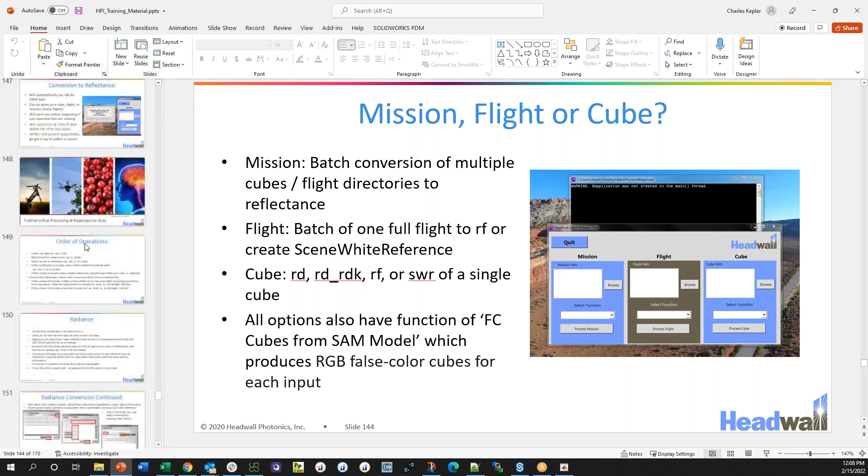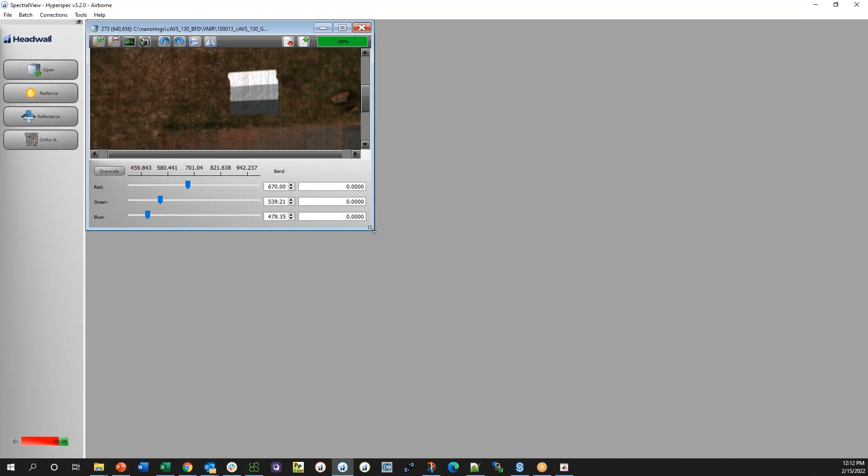When I'm doing my radiance and reflectance conversions, I want to select all of the data and then open it up. And then I'm going to click this radiance button. It automatically finds that radiometric calibration data if it sees it in my Headwall sensor config folder. And then I have to find manually my dark reference.

And then it's going to generate this _RD file. So I click create. And then open. Again, select all the data and open.

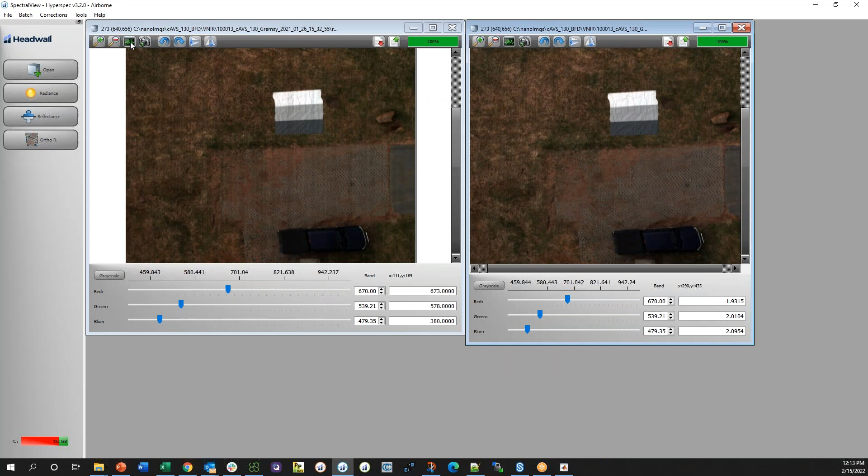And looks pretty similar, but if we do our spectral plot here, this is the raw data, which is in raw digital counts. And then this is the reflectance—radiance data, which is in this crazy unit of radiance, which I don't know exactly how to pronounce. I think it's microflicks or something like that.

And so then at this point now we can take our radiance data and we want to convert it to reflectance. So to do that, we need to have our in-scene white reference. So I'm going to zoom in on this white portion of the tarp and click a spot that is uniform.

So maybe not this spot because it's kind of creased. Same thing, there's a few other there. This looks pretty good right here. So I'm going to right click. You have two options: you can click classify or quick scene white reference. The quick scene white reference will just take the spectrum of that specific pixel you chose, which is fine in a pinch, but it's better to do the classify, and then you can take an average of all the pixels on the tarp. That way you can exclude certain ones that are in the crevices and things like that, but then you get a more representative actual spectrum. So we'll say classify.

You can see our seed pixel is the green, and our calculated average is the black. The black is a little more smooth than the green. But what I'm seeing down here is that...

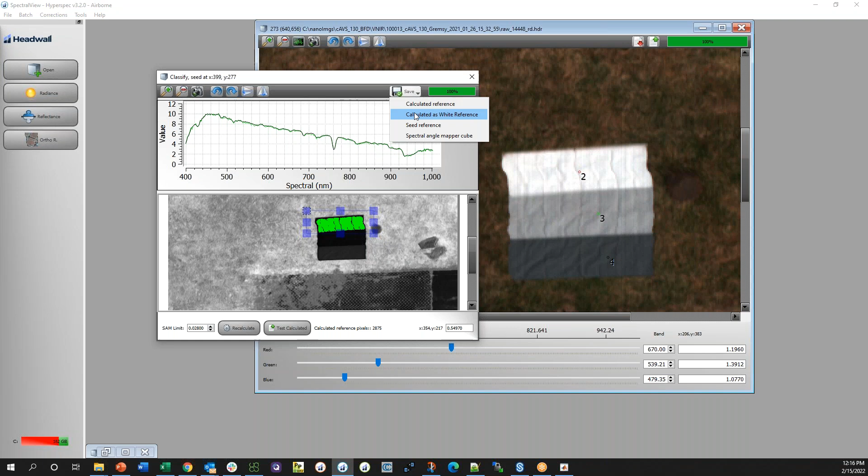Our seed and calculated are pretty much right on top of each other, so that's what we want. Once we see that, we're happy with that. We click save, calculated as white reference.

We want to make sure we choose the correct reflectance profile. In this case, the white is 56%, the gray is 30 or 32% depending on which batch you got for the tarp, and the bottom darker one is 11%. So we chose the 56%, and we're going to save it as the scene white reference file.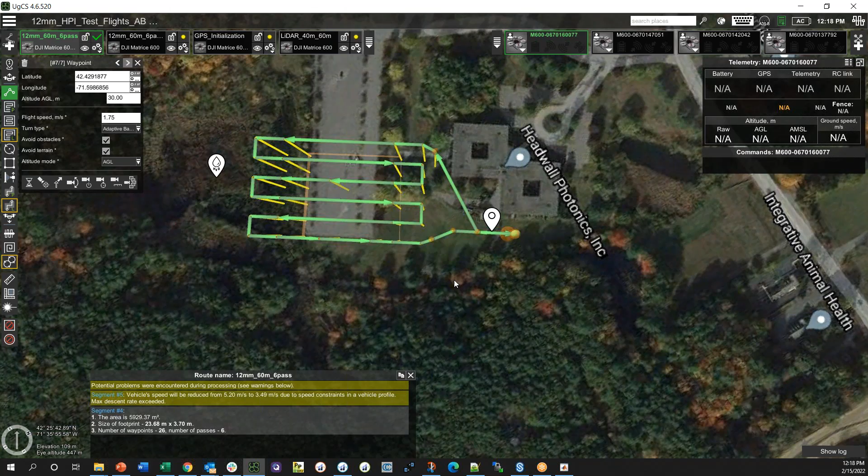Okay, so you can see here's my polygon, here's my flight plan. I have built in this secondary polygon that's over here. So if I'm going to be taking off around here, I put my tarp in here, so I fly over the tarp when I'm on my way to my area of interest.

That way, if I want to fly one over here, one over here, one over here, I have the tarp near me, so I can fly over it on my way to and from my area of interest. I have this dual polygon setup so that I don't have to move the tarp and I can collect it in every flight. So you always want to make sure you collect data over the tarp during your mission.

So whether that's putting it in your scene or putting a secondary polygon with the tarp nearby. And so both of those would be set for the same above ground level height for collecting it, correct? Correct, yep. I thought I saw something where they did a Spectralon panel in one of the videos. Do they ever do that at the beginning when setting up the Headwall?

Maybe I'm misremembering. So when you're setting up your exposure values, you point the system at a white object, like a piece of white plastic or PVC, or even a white piece of paper. You certainly could use Spectralon, and that would obviously be the gold, best thing you could do.

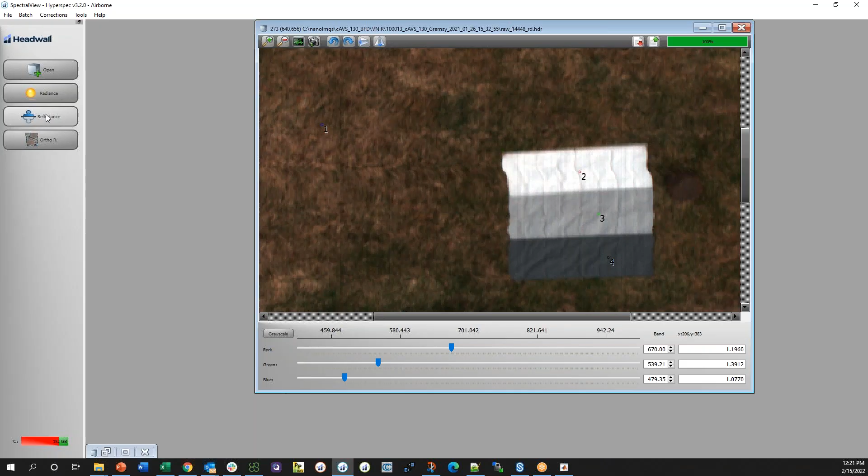Thank you. Okay, so now that we've figured out our scene white reference, I'm going to click the reflectance button and convert this radiance into reflectance by using the scene white reference file we just created. I'll click create and open, select them all, open.

Now we are in units of reflectance, which is where we want to do all of our analysis. If you look at this black one, we see the red edge of vegetation because that's some grass. We expect these lines to be at approximately 56, 33, and 11-ish percent.

I might be in a bit of a crease or something here. That one looks a little high, but that's okay. Once we have our data into reflectance, we did that all on just one single cube. We would next want to do a batch radiance where we convert all the rest of the files to radiance, which I'll just do on 2 files to save time instead of waiting on the processing. I'll just select the first 2 and open.

Calibration, again we're going to select our dark reference. And start. If you already have files there, you would want to overwrite them.

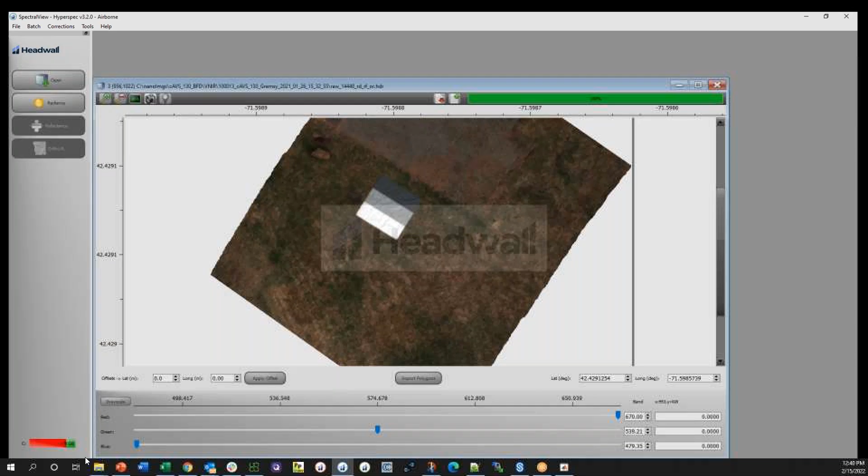Okay, so once we have our altitude set, we will go to batch orthorectification. Again, I'll just pick a couple in here. Normally I'd be doing this on the reflectance data, but since I didn't process everything to reflectance, I'll just do it on the raw for now. But the process is still the same. So I say open—this should be about 2 or 3 flight lines.

I have my SBET automatically because it found it since I'm asking for this APX. It looks in my DEM folder, sees the Headwall DEM, and finds the highest resolution DEM that it has of that area, so I'm going to keep with this one. If you wanted to use a different DEM, or it didn't grab the one you want, you could always click the 3 dots and navigate and select the correct one.

It pulled in that ortho INI file with all these values that we have. Again, I want to save the ortho INI locally to update that file if I make any changes. I wouldn't recommend using the sensor config folder—that's going to update the one in your sensor config folder, which is kind of your factory one. I wouldn't make any changes to that unless you say, well, Charlie came up with -0.2, but I really think -0.3 is a better starting point. So if you want to update the factory one, you can do that by saving to the sensor config folder, but otherwise just update locally.

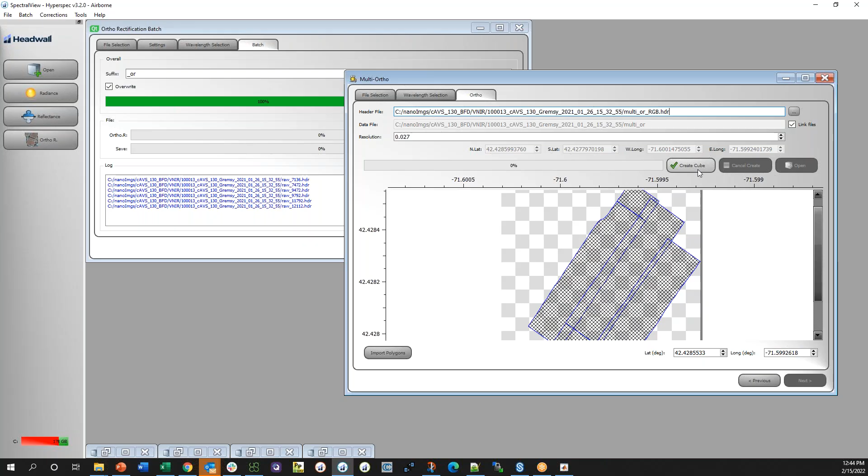And then once you are happy with that, you say create cube, select open.

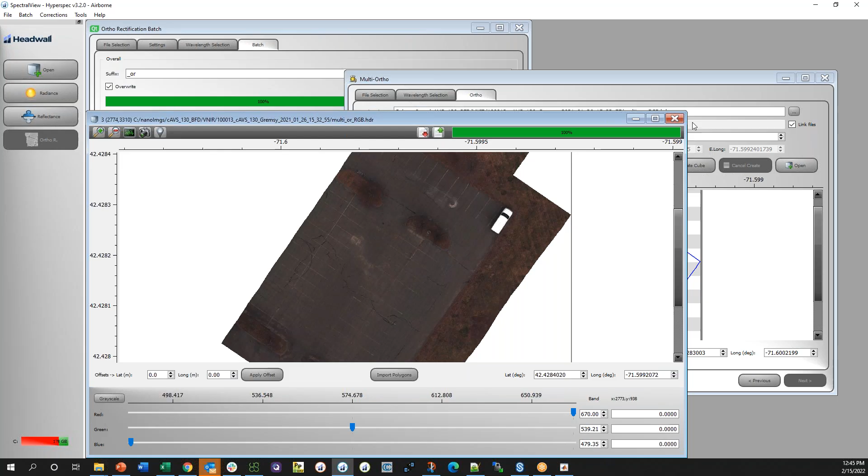Clearly, when this was flown, it was, I think, the end of January last year. So the grass, there's no snow, but the grass is all pretty much dead, so not a lot of green stuff here. And it might have been a darker day too. But you can see these 3 passes are all mosaicked together now, and I don't really see anything that would need to be changed.

So I'm looking at the overlapping regions, kind of along here and along here. If you see any artifacts, you might want to go back and adjust your roll or adjust your pitch or something like that. But actually, from this example, I'm not seeing anything obvious. Maybe you can see right here that is slightly off, so maybe I would go back and adjust my pitch just a little bit.

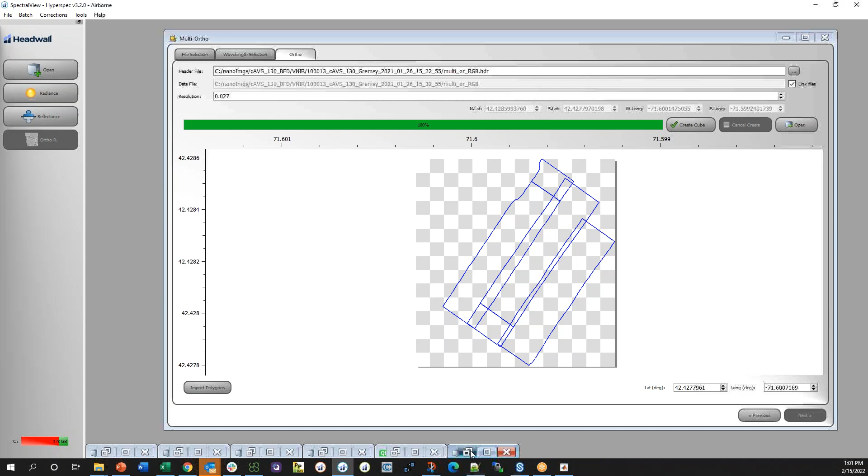I don't know if you can do that in our software or not. Okay, well, it's something to look at. If you could actually pull the positions of the ground control points, then you could play with that a bit. Your software just does lat long, right? It doesn't do UTM? That's a good question, I'm not positive.

That's the quickest way to get meter distance if you had two points of known distance apart. Yeah, I think it is just lat long. But if you have questions like this that I don't necessarily know the answer to off the top of my head, feel free to write those to me in an email or a support ticket, and I can go ask some of our software people who are more involved in writing the code and can look that info up.

Sure, I mean this is down the road, we've got to get to the point of collecting data first. Yeah. The other thing is, on the flash drive, if you guys end up finding it, there's this same data set for your system, so feel free to mess around with that. Set everything to zeros and see if you can recreate what we came up with here.

I'd say get your training from the UAV stuff, then get the sensor integrated and do a test flight, and then see if you can do it on your own. If not, come back with questions and I'll be happy to help. But you'll have this recording and the PowerPoint slides, so everything should be good to go.